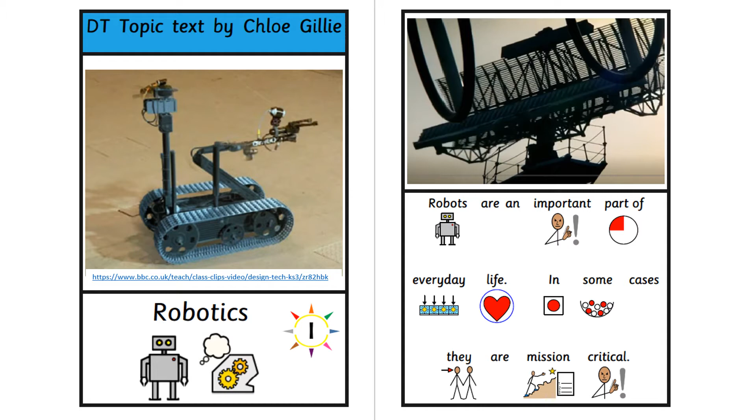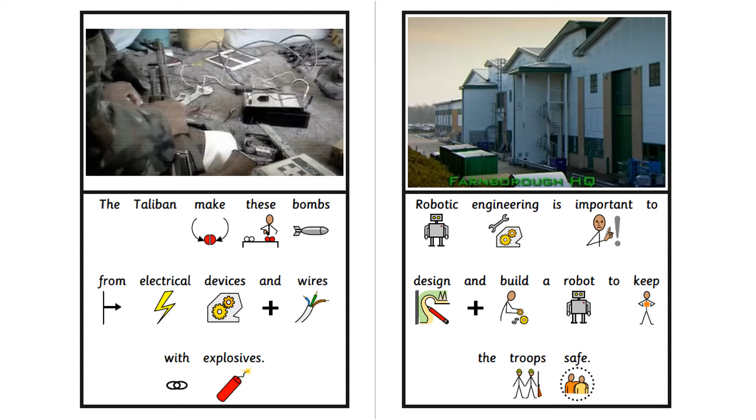The reporter says the biggest killer of troops in Helmand, Afghanistan are from roadside bombs. Up to 80% of the deaths of British troops caused by the Taliban are from these explosions. The Taliban make these bombs from electrical devices and wires with explosives. Robotic engineering is important to design and build a robot to keep the troops safe.

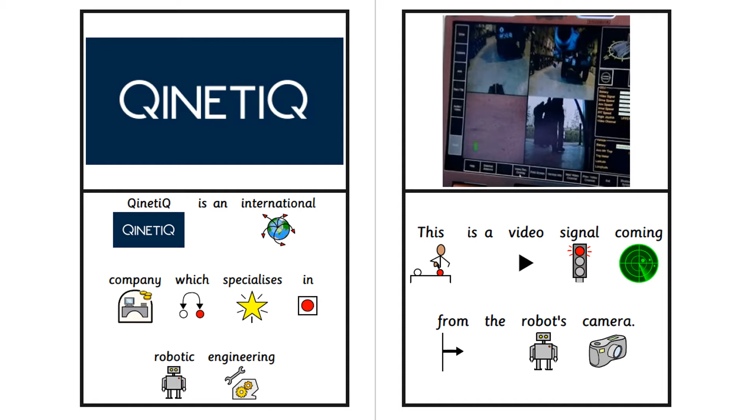QinetiQ is an international company which specializes in robotic engineering. This is a video signal coming from the robot's camera. The soldiers are being trained to use the camera on the robot. Why is this a good idea?

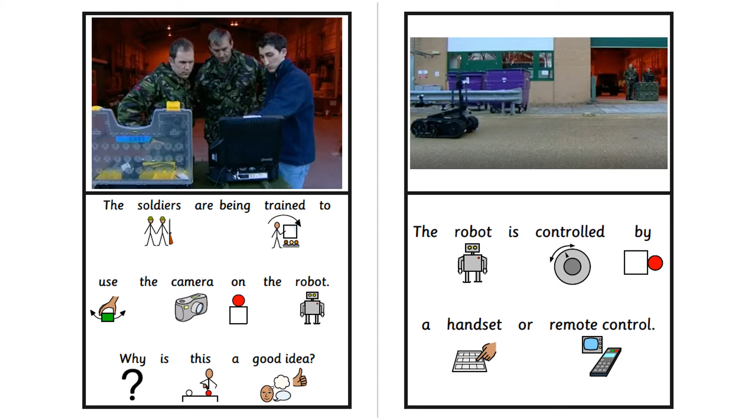The robot is controlled by a handset or remote control. This makes them very important as they can get into the dangerous places. QinetiQ have to redesign their robots and build better ones to help with the war.

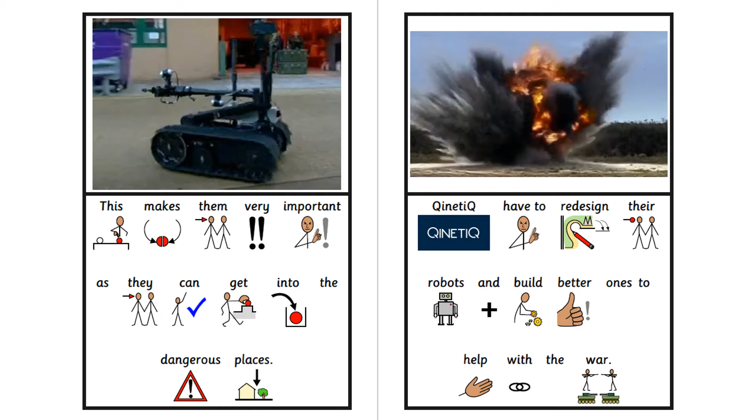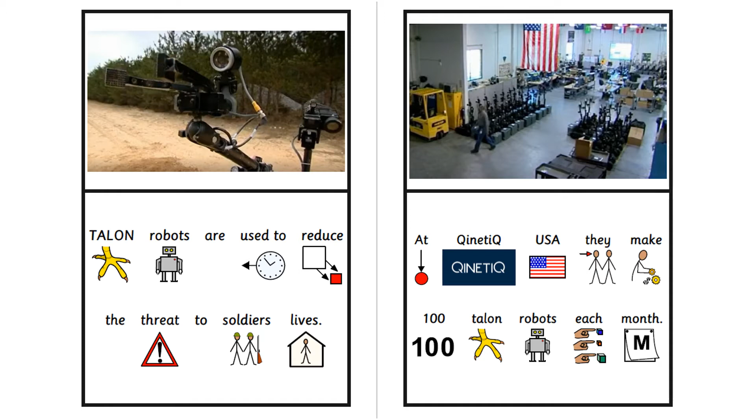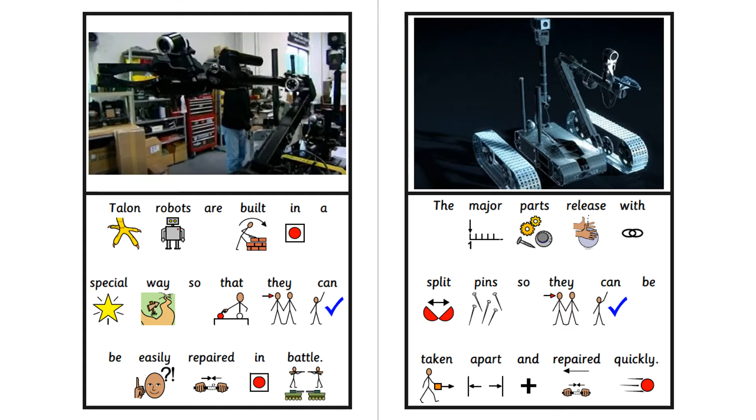Talon robots are used to reduce the threat to soldiers' lives. At QinetiQ USA, they make 100 Talon robots each month. Talon robots are built in a special way so that they can be easily repaired in battle. The major parts release with split pins so they can be taken apart and repaired quickly.

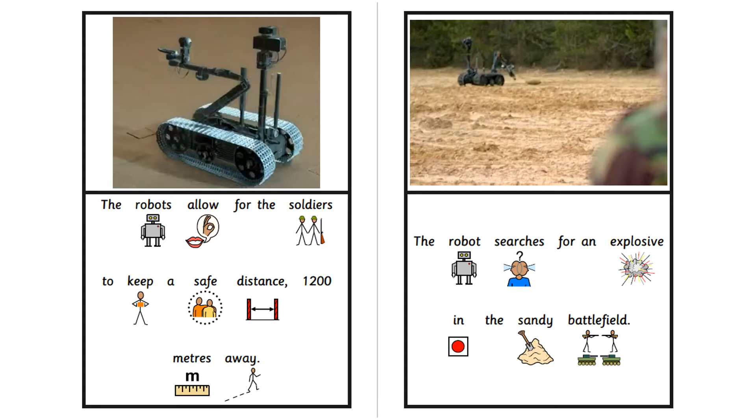The robots allow for the soldiers to keep a safe distance, 1,200 meters away. The robot searches for an explosive in the sandy battlefield. The robots are controlled by the soldiers. They are human-operated machines. The engineer says the robot is like giving a soldier an arm a mile long.

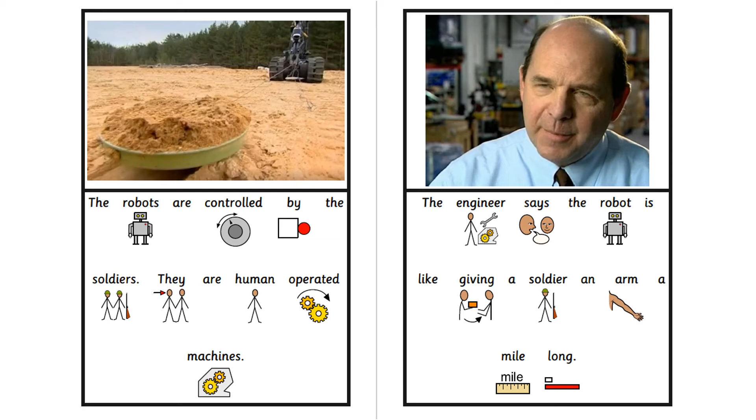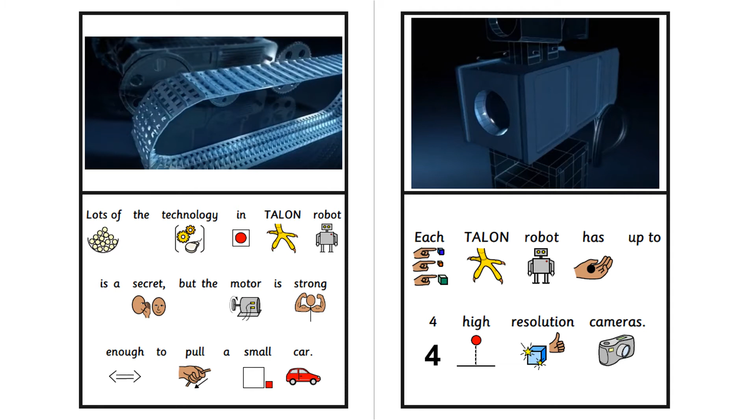Lots of the technology in Talon robot is a secret, but the motor is strong enough to pull a small car. Each Talon robot has up to 4 high-resolution cameras. The operator of the camera gets a 360-degree view all around.

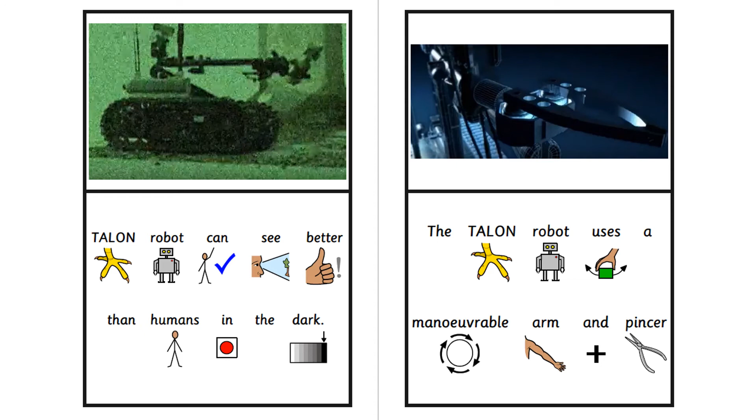With infrared and night vision, Talon robot can see in the dark, better than humans. The Talon robot uses a maneuverable arm and pincer.

A key design feature is that the arm can be easily removed and replaced in 20 minutes. This is important as the arm gets broken in the explosions.

Battlefields are not the only places where robots can be used. Jen is a senior specialist. She is going to modify the robot to use it for a different task, adapting the robots to work for civilian rescue services.

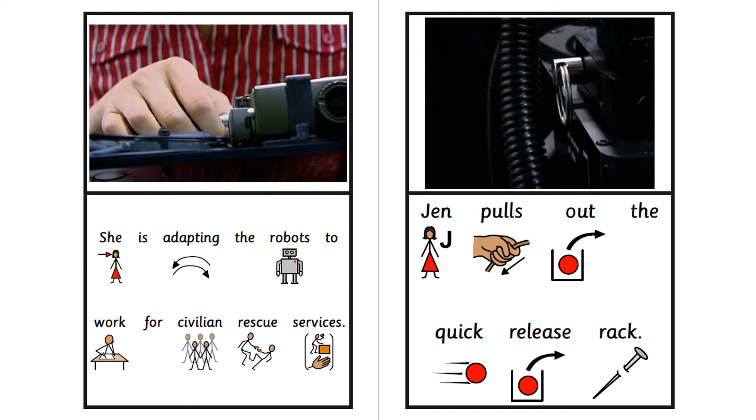Jen pulls out the quick-release rack. One of the sensors is a toxic chemical sensor, the other is a radiation sensor. They will also add a sensor to detect gas, preventing fires, and have a temperature sensor on too.

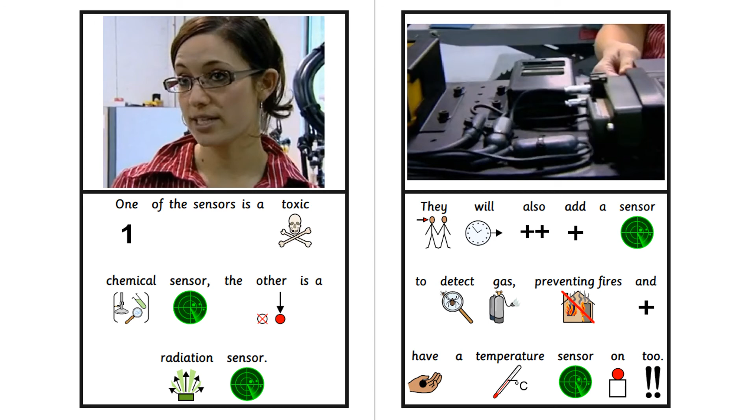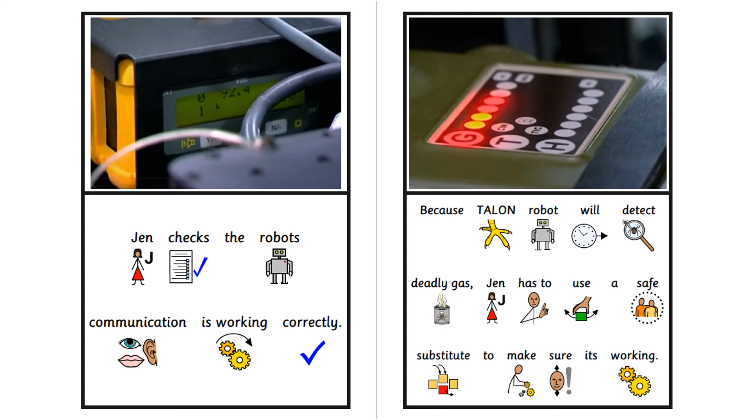Jen checks the robot's communication is working correctly. Because Talon robot will detect deadly gas, Jen has to use a safe substitute to make sure it's working. Jen and her team check the robot is working and use the word clear. Jen is American but has been working with colleagues in the UK.

The Talon robot can detect chlorine, carbon monoxide, and other gases which cause fire. Jen asks her colleague to check with the London Fire Brigade about which sensors are the most safe and helpful.

QinetiQ's team are now on call 24 hours to assist with the robots for the London Fire Brigade. QinetiQ engineers are there to support them using robots to find hazardous materials which could have started the fire. The firefighters are kept safe by using robots in a dangerous situation.

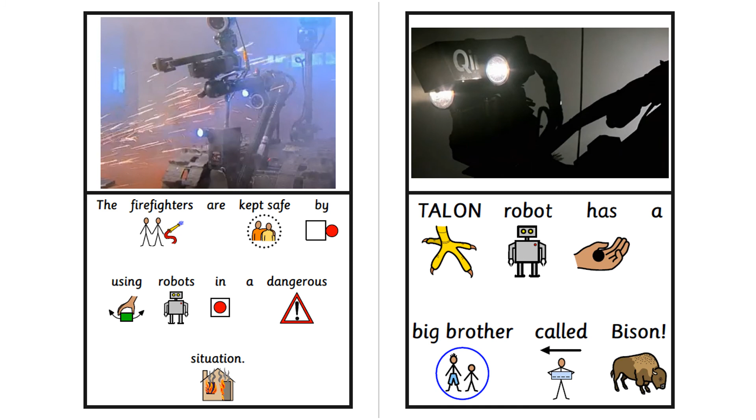Talon robot has a big brother called Bison. The robots are operated from a custom-fitted vehicle. This is the command center of the van. In the van, screens show what the robots see and can record what is happening, which can be used as evidence for the fire brigade if they need it.

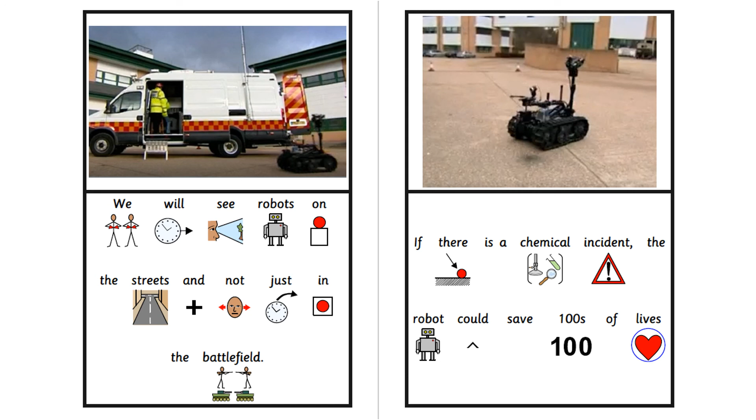We will see robots on the streets and not just in the battlefield. If there is a chemical incident, the robot could save hundreds of lives.

And that's our topic text all about robotics finished. This was a topic text featuring different uses of robotics to respond to critical situations and the key features of the Talon robot.